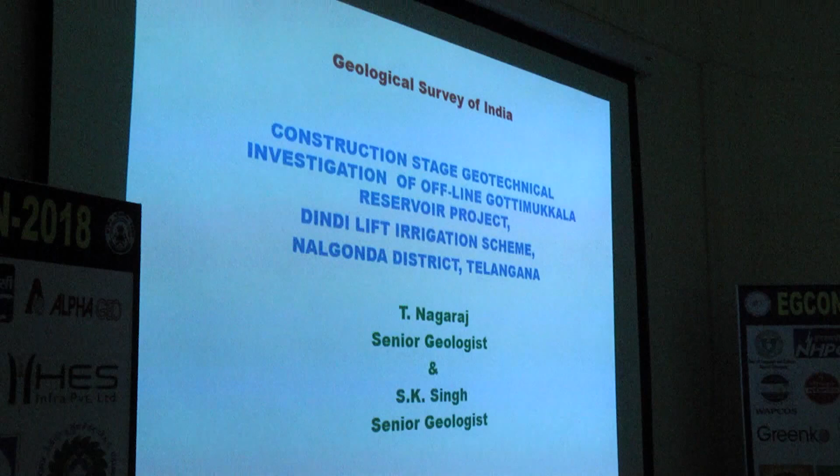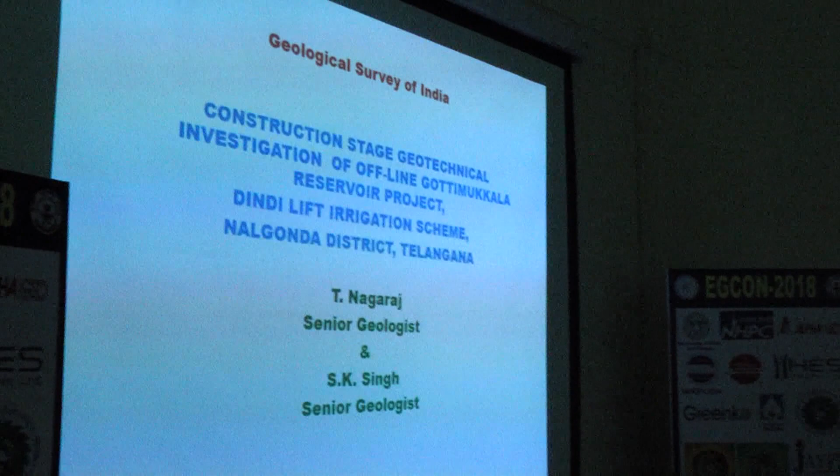Now I will be discussing the construction stage geotechnical investigation of a reservoir project named Gottimukkala, which forms a part of the Dindi lift irrigation scheme. Actually, this is the scheme. This is the foreshore of Srisailam reservoir, and from here water will be tapped, and this is 325 level.

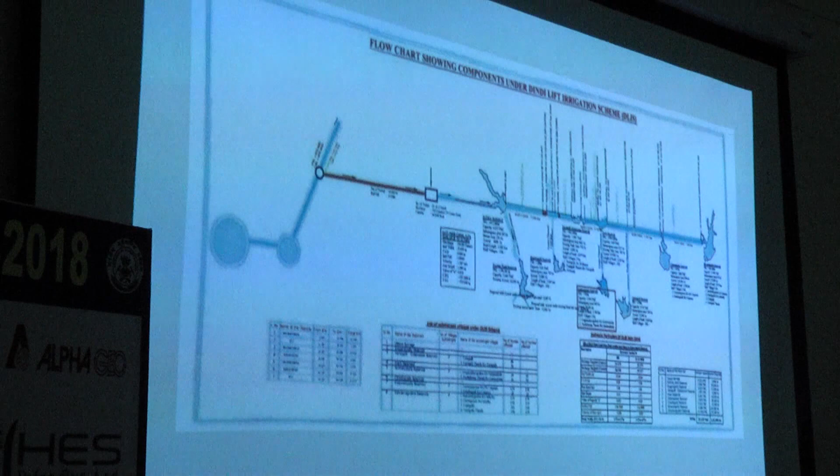Here water will be lifted to a height of about 80 to 90 meters, and it will be allowed to flow to fill all these reservoirs en route, the first being the Singarajpalli reservoir, and there lies our Gottimukkala reservoir, which is fourth in the row, through a canal system which is 59 kilometers long and having a 22 meter base width. Actually, there are 7 reservoirs along the flow direction, that are Singarajpalli, Erapalli, Gokavaram, Irvin reservoir, and this is the one which I will be discussing.

Actually, the scheme involves drawing of water and letting it into the approach channel and through a 10-meter dia tunnel, and finally that will reach the Ulpara barrage, and from there on, all the reservoirs en route will be filled up. So this is actually the scheme, and this is from where the water will be lifted and allowed to flow through the canal. First, this is Singarajpalli. Then come 7 reservoirs. This is an old map. So ours is the fourth in the row. This will be the Gottimukkala reservoir we are talking about.

So this is an 18.6 meter high and 3850 meter long reservoir with a 5-gated spillway with 6 blocks. It's an offline reservoir which will be filled by the Dindi main canal through a 13 kilometer long offline approach channel. For this, construction stage geotechnical investigations were carried out by me on 1:100 and 1:200 scale: 1:100 for the gravity structure and 1:200 scale for the cut-off trench of the earth dam.

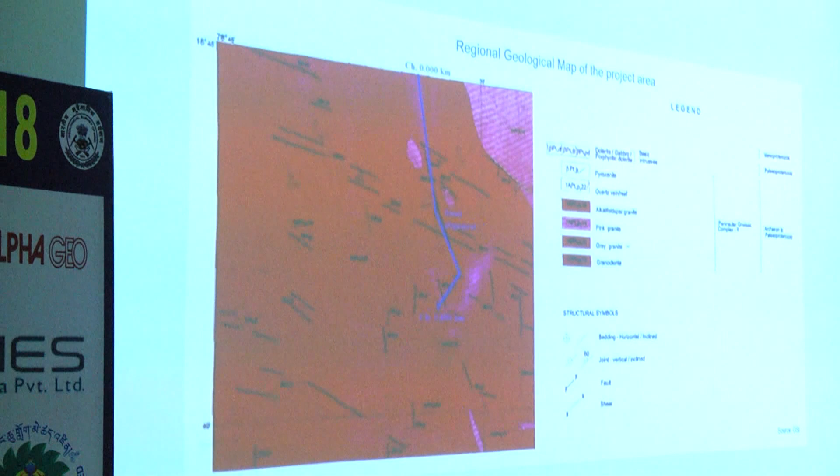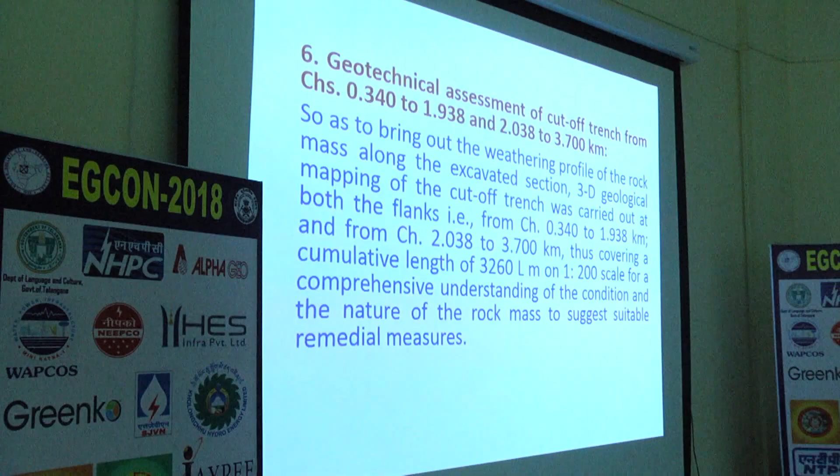This is the geological map of the area. This is our dam, which mostly runs in pink granites and grey granites. First, geotechnical assessment was done from chainage 340 to 1938, leaving a gap of 100 meters for the gravity structure, that is the 5-gated spillway, and again from 2038 to 3.7, where this will be the end of the dam. To bring out the weathering profile and bedrock characteristics, 3D geological mapping of the excavated cut-off trench of the earth dam was carried out in 2 reaches, left and right flanks, on 1:200 scale.

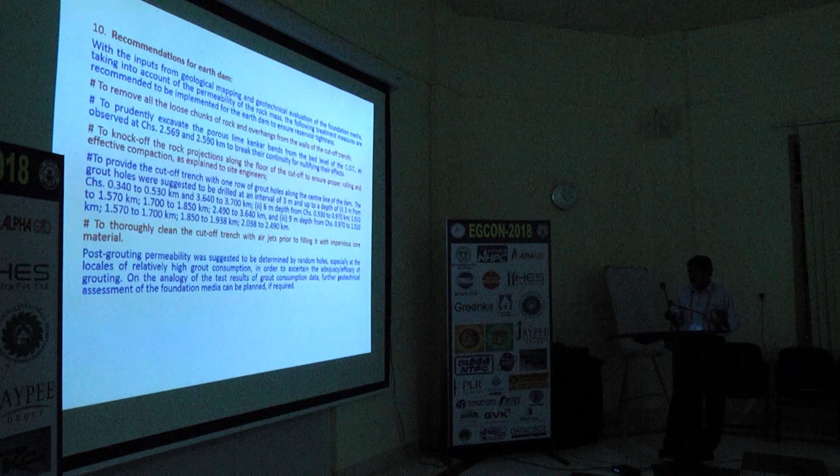And also depending upon the water column. The recommendations were based on lithology, orientation of joint sets or structural discontinuities with respect to the orientation of the dam alignment, and also height of water column. These are the factors that were considered. And finally, before filling with hearting soils, it was supposed to be cleaned thoroughly. Okay, sir. This is something about the earth dam.

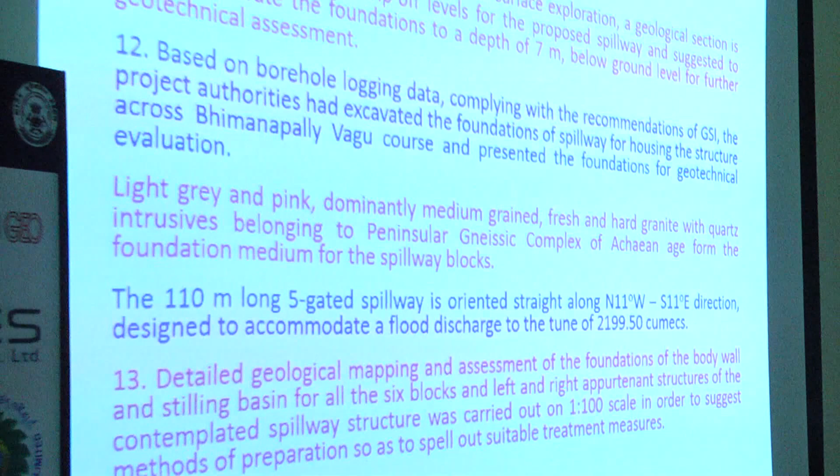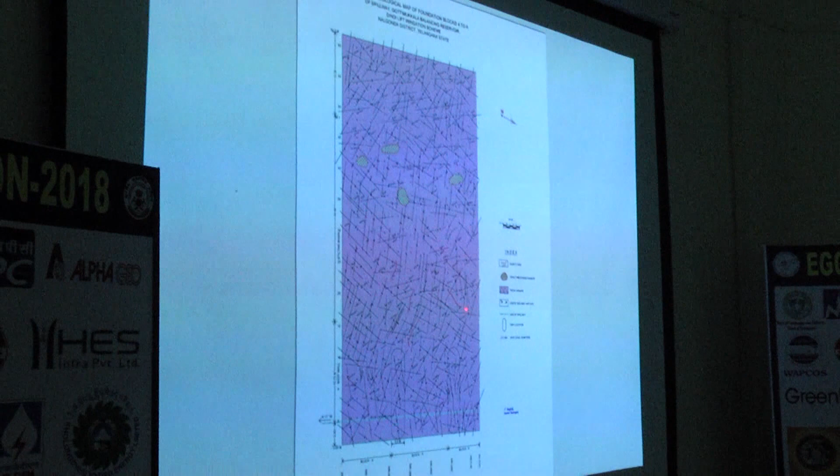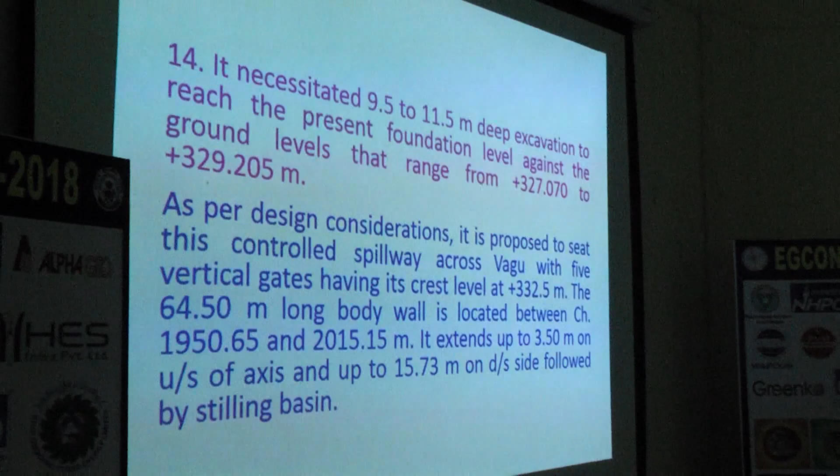This is blocks 4, 5, 6, where geological mapping was carried out. There you can see some acidic quartz veins and this highly weathered bedrock. The entire thing is granite. So it necessitated 9.5 to 11.5 meters depth of excavation to reach the present level of foundation grade. Okay, sir.

And again, this is the same set of joints which I encountered in the earth dam section, repeated, and permeability tests were conducted again almost in every block, every 20-25 meters. There, up to a depth of 18 meters, I tested the permeability of the bedrock with applied pressures of 1.5 to 2.5 kg.

Why? Because our earth dam maximum section there is 18.75 meters. That is why I suggested 1.5 to 2.5 kg per centimeter square pressures to be applied. If you apply more pressure, the joints will get opened up. This was the theme behind all these things.

So finally, the test results showed that the Lugeon or permeability value of the bedrock in this gravity section ranged from 17.7 to 33 because of blasting operations. So recommendations for the spillway were given like this, sir. To remove overhangs, as many overhangs were found because of blasting. And a lot of curvilinear joints were there which were very smooth, so they were suggested to be roughened up.

Then sloping, sir. Then finally, to provide consolidation grouting in the body wall portion, starting from the spillway axis, up to a depth of 12 meters at a spacing of 3 meters to seal off all the pervious or open jointed zones. And not satisfied with this, post-grouting permeability was also suggested to have a better understanding of the bedrock.